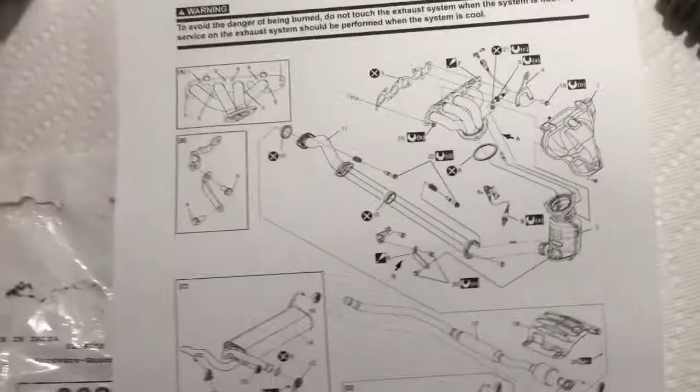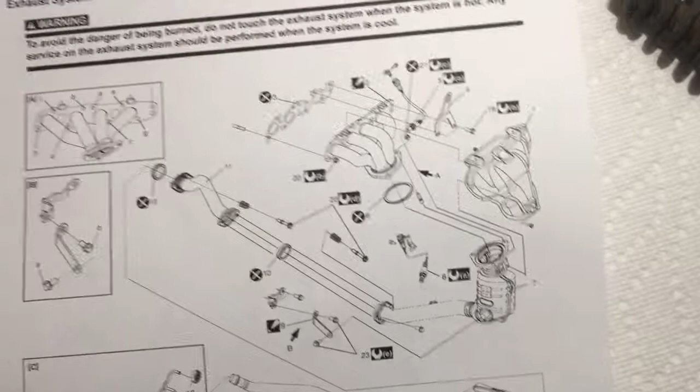Right, so I'm actually in my kitchen here as opposed to my garage, but it's as good a place as any to show you a drawing, I suppose. So I had a wee bit of grief with the exhaust system on my car lately. I have done so before, and like everything else, I've got two SX4s. I've had them for quite a few years now, and they all fail in the same way, right? So I thought it might be actually helpful to somebody.

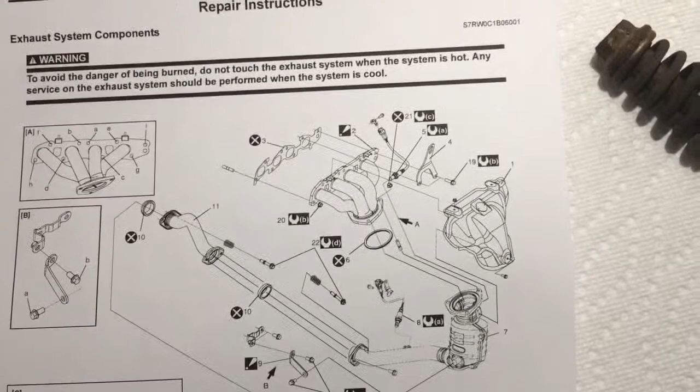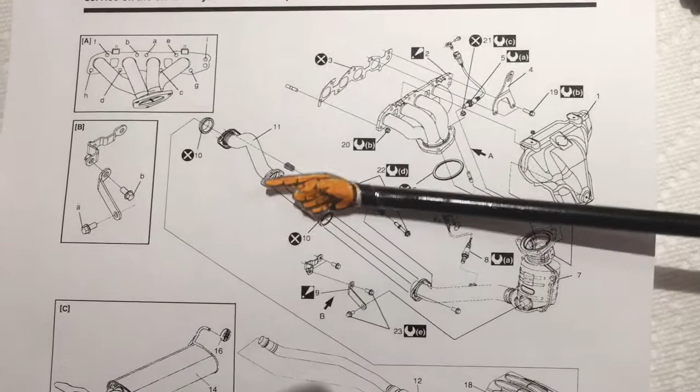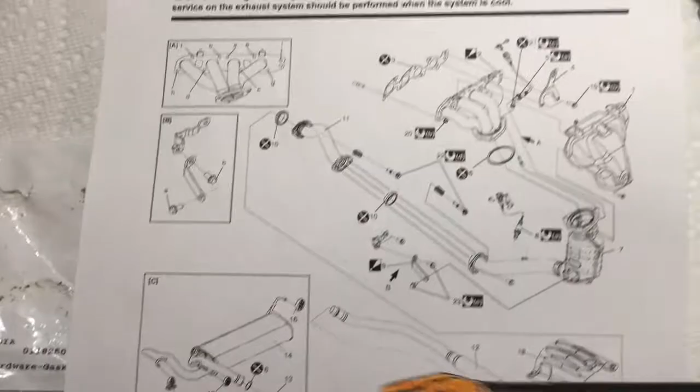This is really going to only interest anybody with an SX4, but here's just a drawing from the manual. It's a bit convoluted how they've drawn it, but you can see the exhaust manifold itself down at the catalytic. There's an intermediate pipe here, and then it goes back this way. That's the middle pipe, as they call it, that goes back to the muffler assembly. So it kind of does a bit of zigzag on the drawing, on the schematic, but in reality, front to back, of course. But where it typically fails, in my experience, is actually at this intermediate pipe.

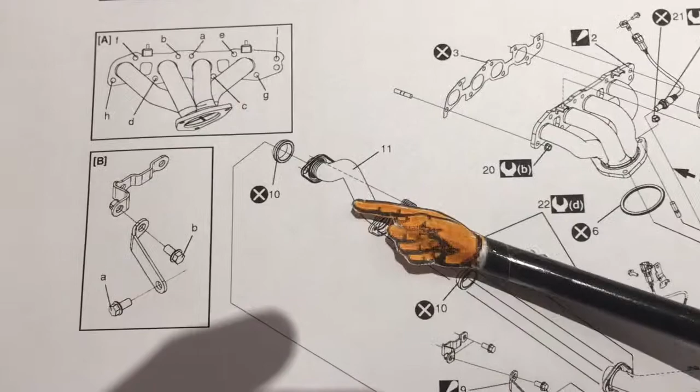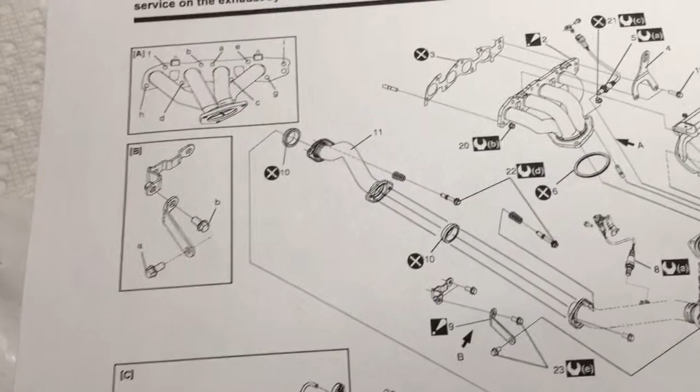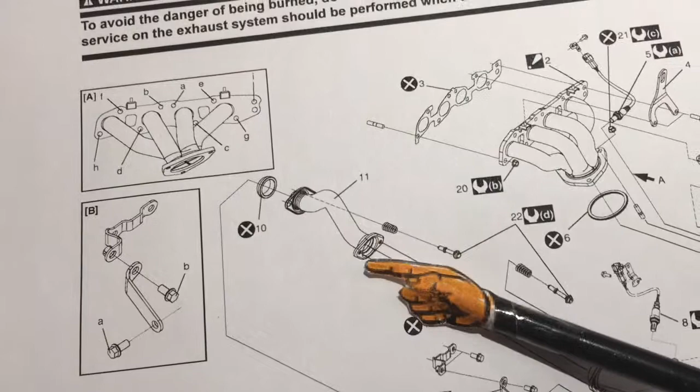As far as I know, all the pipes are actually stainless steel, so they're very durable. And I've never experienced a failure in any of the actual piping itself. But where it does fail is actually this intermediate pipe here. There's two flanges on it, and there's two seals on either end of that flange. It's like a conical or a spherical seal that actually sits inside the opposite cutout that's in the flange itself, of course.

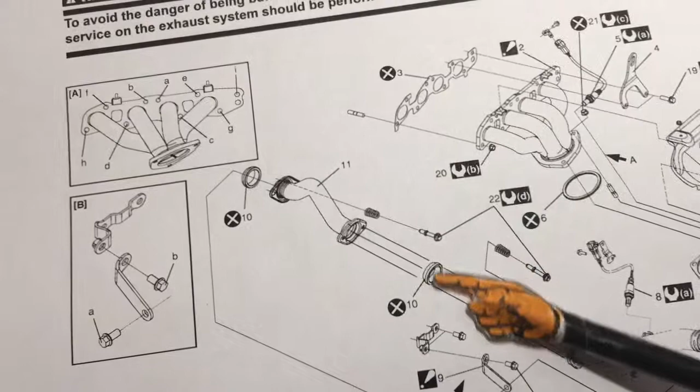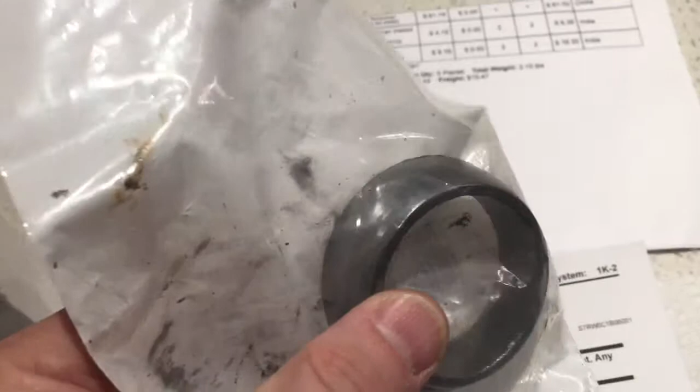And it's made of lead, so as the pipe actually flexes to and fro over the course of the years, this essentially wears itself away to nothing, and then you end up with a pretty significant exhaust leak. So this is actually the part itself, what I'm talking about. And I got this from Rock Auto. Here's the part number, if you're interested. There's two of them on the car, one on the front and one on the aft flange of the intermediate pipe itself, as I said.

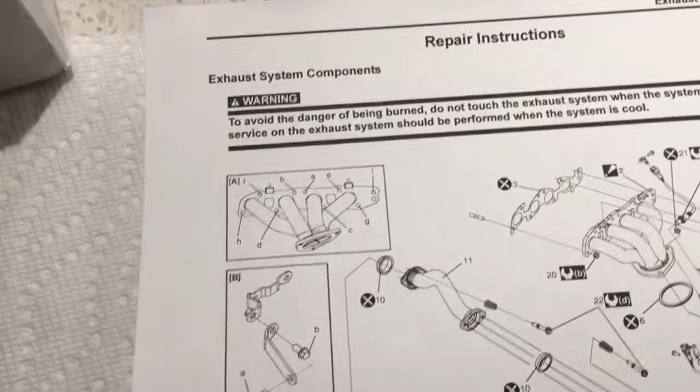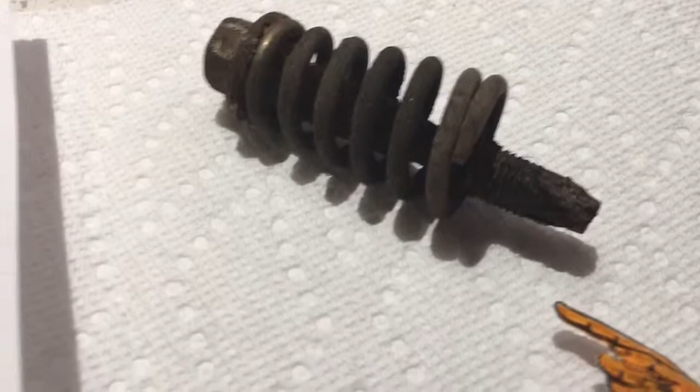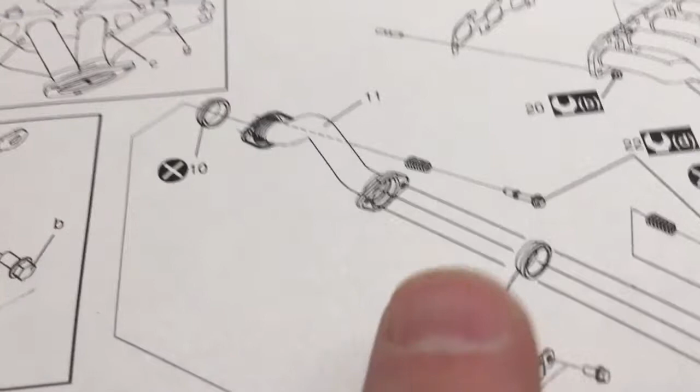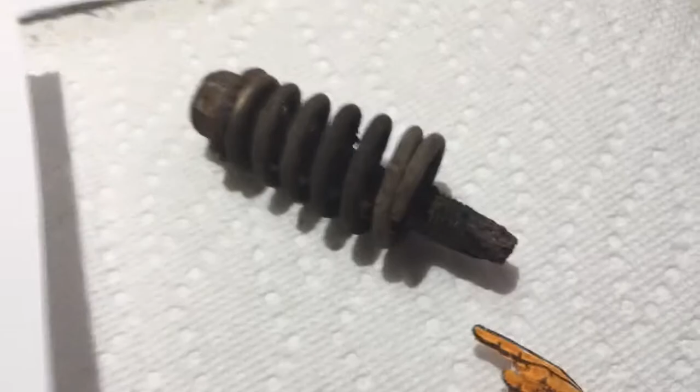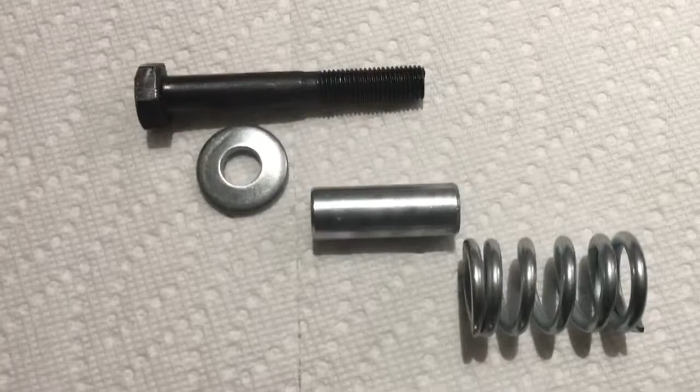On these two flanges themselves, there's no nut, but there's actually two anchor nuts that are welded into each flange from the factory. So those are going to be gone as well. So when it comes to the attach hardware, this is the kit. That's the part number for the kit. And here's what actually comes in the kit itself. It comes with a bolt, a conical washer, a spacer, and a spring. When it's assembled, it looks like that. But it doesn't actually come with a nut.

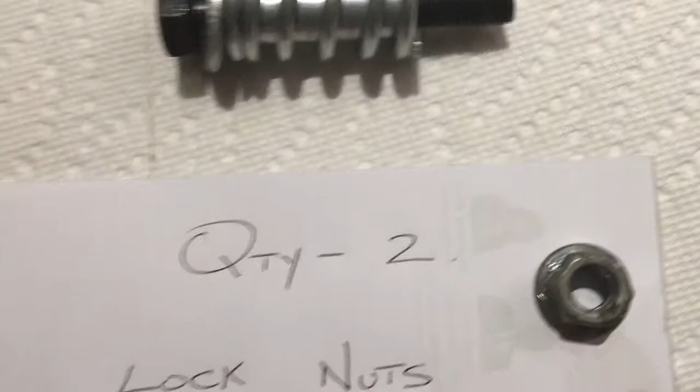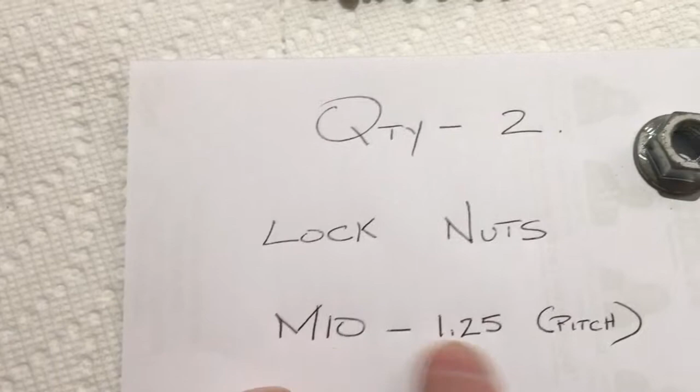And as I said, in all likelihood, you're going to need a nut. That's not the correct nut. That's just there for demonstration purposes. So you'll need two of them, because there's two bolts on each flange. And as far as I can tell, I measured it up, it's an M10, and the pitch of the thread is 1.25. So you'll need two suitable lock nuts, something like this. Any type of lock nut, serrated ideally, so it stays in place. Something suitable for exhaust work anyway. Or two jam nuts might actually do the trick for you as well.

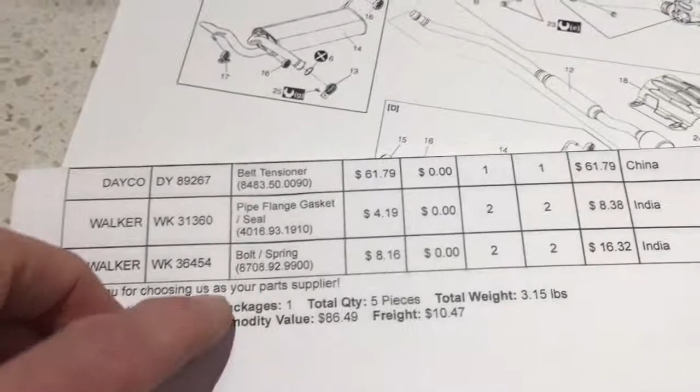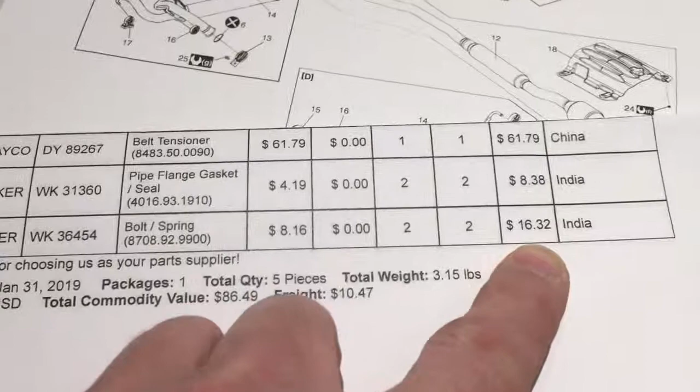So I thought I'd pass those details on. The prices are very reasonable. So there's the gaskets. They were $8 and change for two of them. That's American, I believe, and the bolts were very reasonable as well. So it was like $8 each and $10 each Canadian. So anyway, I hope that's of some use to somebody, and I'll leave it at that.